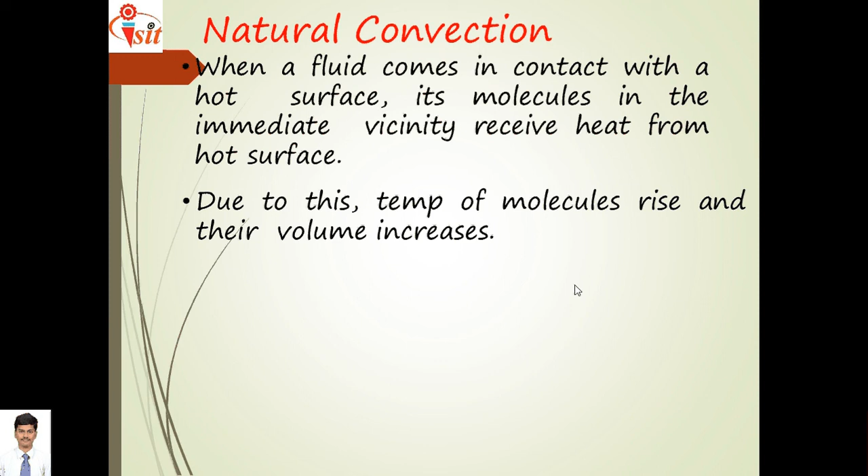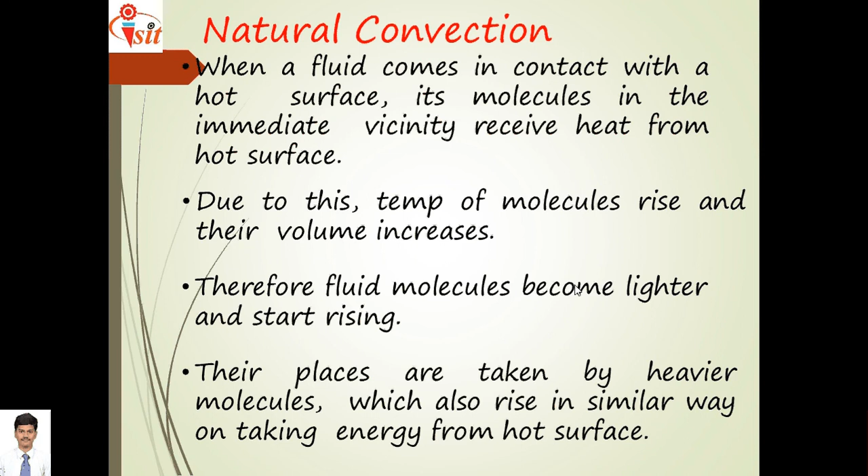So what is natural convection? When a fluid comes in contact with a hot surface, it receives heat energy as soon as it touches the surface and becomes hot. Due to absorption of heat energy, the temperature of the molecules rises and their volume increases. Therefore the fluid molecule becomes lighter, and as it becomes lighter it goes up and starts rising. It is replaced by heavier cold fluid, which again receives heat energy from the hot surface, goes up, and is again replaced by cold fluid.

This is the way of natural circulation of air, and the transfer of heat from a solid surface to fluid in this manner is called free convection or natural convection. As the fluid flows automatically, it is known as free convection. Similarly, when the surrounding fluid is hotter than the surface, heat transfer will take place from fluid to surface.

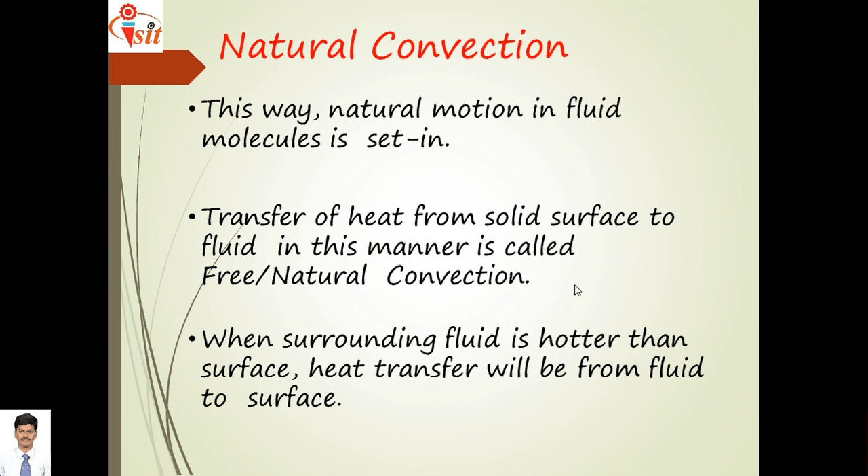So we will see a few examples here. First example, vertical hotter plate, which we can also treat as a wall. When the wall is hot because of absorption of solar radiation, air flows automatically outside, receives heat energy, goes up, and is again replaced by new cold air which again receives heat energy and rises. This is nothing but natural circulation of air, or natural convection current.

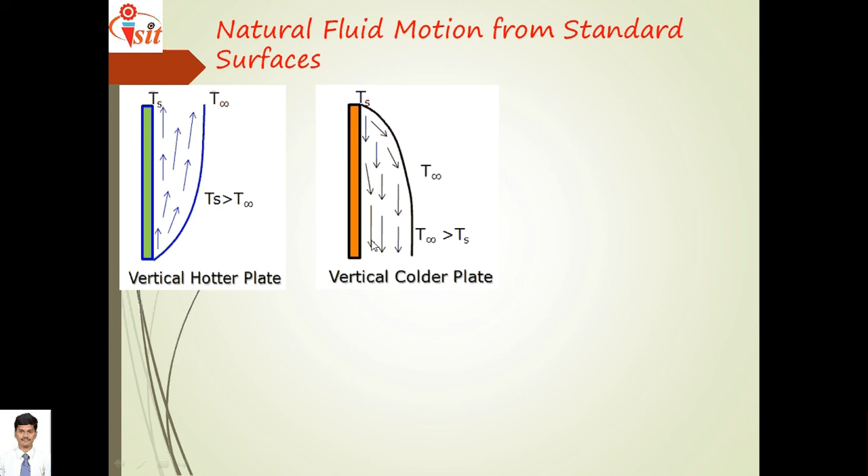This is the second case. What is the difference here? In the first case, surface temperature is greater than surrounding temperature, but here surrounding temperature is greater than surface temperature, so exactly the opposite phenomenon takes place. Hot fluid flows over this cold surface, is replaced by new hot fluid, and in this way natural circulation of air takes place.

This is the third case, horizontal hotter cylinder: air flows over it and cooling of the cylinder or sphere takes place. This is one more example, horizontal hotter plate. What is the difference between these two? Here the hot plate is vertical, here the hot plate is horizontal. As it is hot, air flows automatically over this hot plate, becomes hot, and goes up.

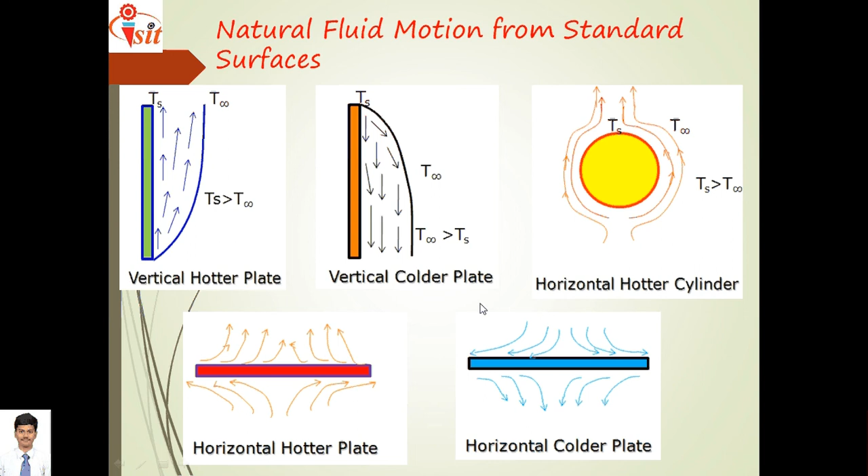Similarly, these two cases are alike, but one is a vertical cold plate and the other a horizontal cold plate, and the formation of the convection current is also different.

Now the governing equation: as we know from Newton's law of cooling, Q is equal to H A (Ts minus Tf), where A is the area of the object, Ts is the surface temperature, Tf is the fluid temperature, and H is a function of rho, g, beta, delta T, L, mu, Cp, K. From dimensional analysis we get the empirical correlation as HL upon K equals C times (rho square g beta delta T L cube divided by mu square) raised to A, times (mu Cp upon K) raised to B.

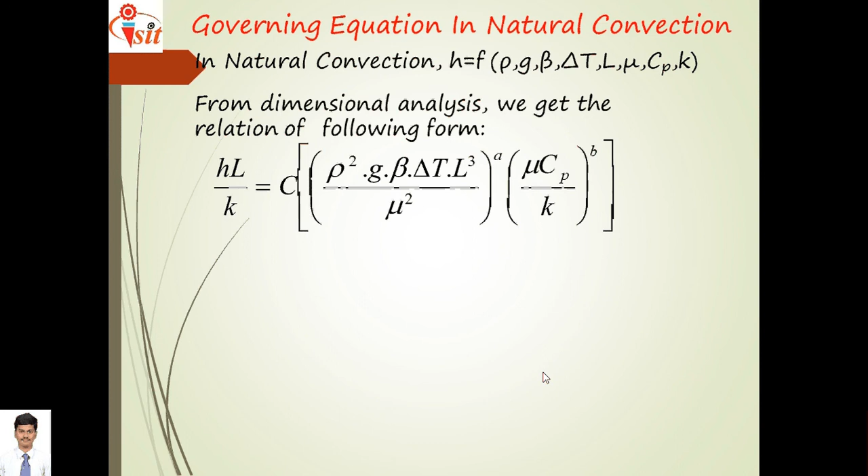HL upon K is nothing but the Nusselt number, so Nu equals C, a constant, times Grashof's number raised to A, times Prandtl number raised to B. We studied this formula in one of the earlier video lectures on dimensionless numbers. This term is known as Grashof's number, and it plays a very important role in natural convection: rho square G beta delta T L cube divided by mu square, times Prandtl number raised to B.

Mu Cp upon K is nothing but Prandtl's number. So Nusselt number equals C times the product of Grashof and Prandtl numbers raised to N, and this is the governing equation for natural convection.

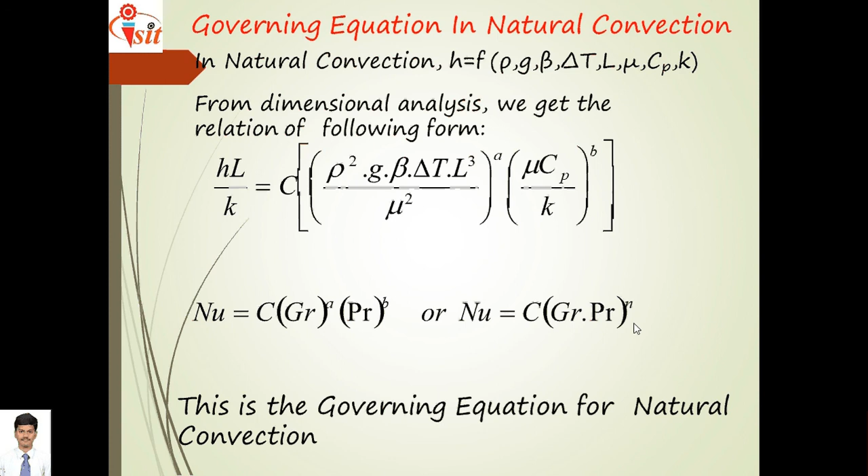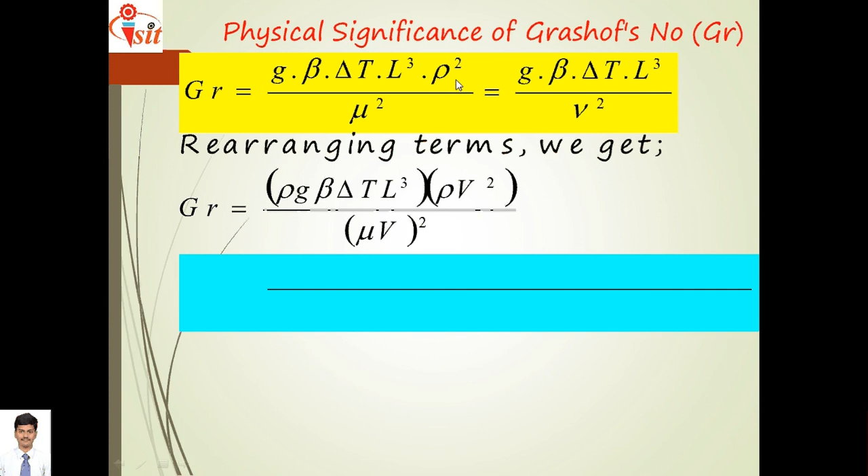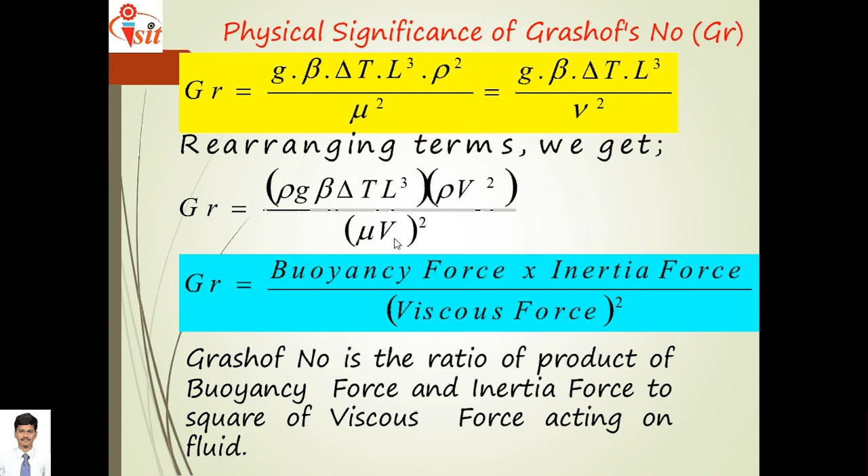What is the importance or physical significance of Grashof's number? Grashof's number equals G beta delta T L cube rho square upon mu square, and by rearranging this we get Grashof's number equals buoyancy force into inertia force upon viscous force squared. So Grashof's number is the ratio of the product of buoyancy force and inertia force to the square of viscous force acting on the fluid, depending on buoyancy force, inertia force, and viscous force.

Now various empirical correlations: in forced convection also we had seen a few empirical correlations. Students must remember that these empirical correlations will be provided to you in the examination. For a vertical plate and cylinder, Nusselt number equals 0.56 times (Grashof into Prandtl) raised to 1 by 4, and this equation is valid for a certain condition.

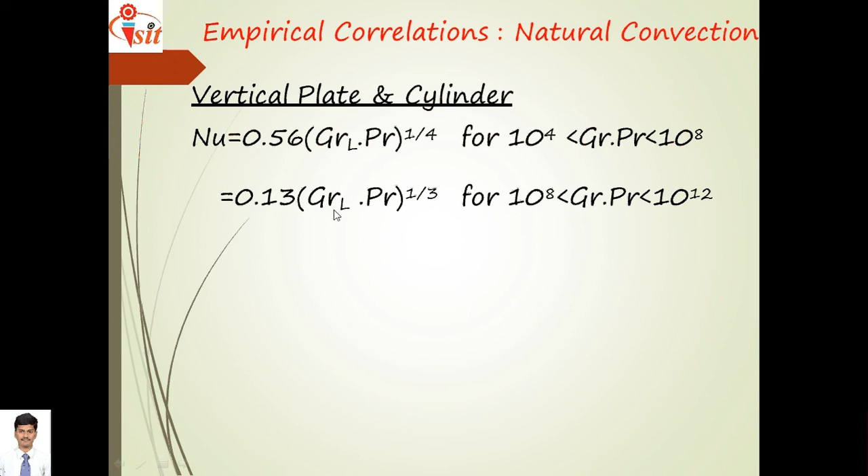The product of Grashof and Prandtl number must be greater than 10 raised to 4 but less than 10 raised to 8. If this condition does not occur, the empirical correlation becomes 0.13 times (Grashof into Prandtl) raised to 1 by 3. For a horizontal cylinder, these are the empirical correlations.

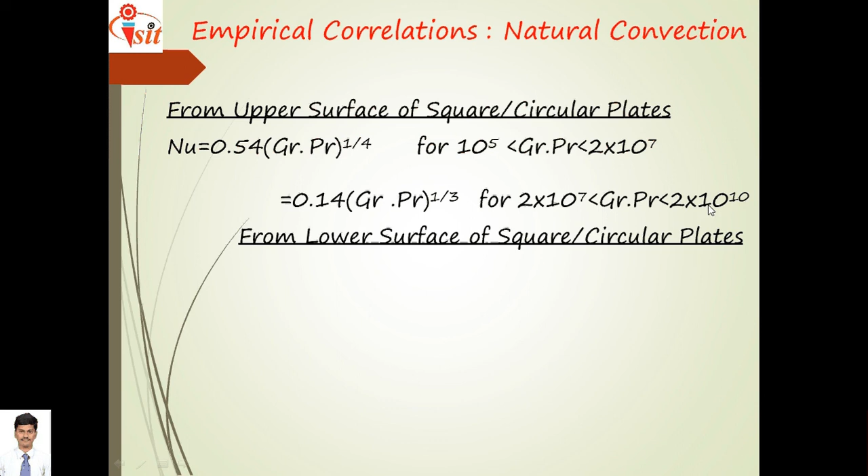For upper surface of a square or circular plate, Nusselt number equals 0.54 Grashof's into Prandtl raised to 1 by 4, and this is the condition to use this empirical correlation. Similarly, if Grashof's into Prandtl is greater than 2 into 10 raised to 7 but less than 2 into 10 raised to 10, we use this other empirical correlation, which will be provided to you in examination.

Students should remember L is the characteristic length, and L can be calculated by the formula A upon P, where A is the area and P is the perimeter.

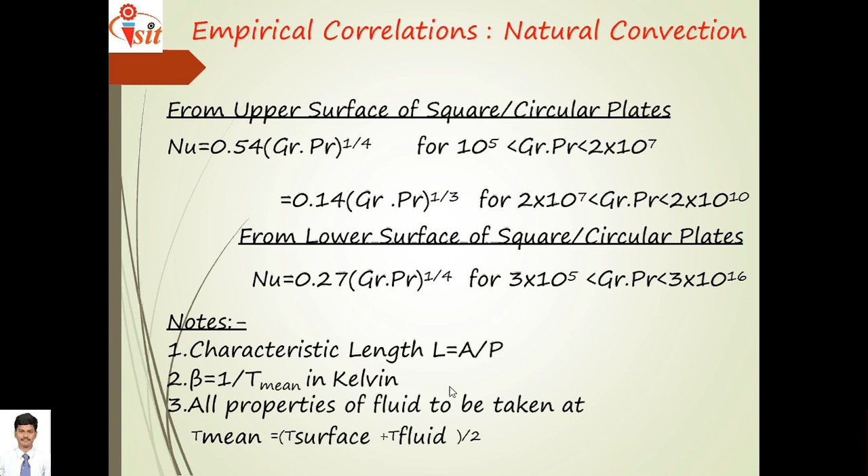Beta is equal to 1 upon T mean, where T mean means mean film temperature, and all properties of fluid are taken at mean film temperature. To calculate mean film temperature, we must know surface temperature of plate and fluid temperature, and the average of these two, Ts plus Tf divided by 2, is nothing but mean film temperature.

So, a few dimensionless numbers we already studied: for conduction, Biot number equals HL upon K, Fourier number equals alpha T upon L square. For forced convection, various dimensionless numbers exist, with Nusselt and Prandtl being common to both natural and forced convection. Nusselt number equals HL upon K, Prandtl number equals mu Cp upon K, Reynolds number, very important in forced convection, equals rho VL upon mu, Peclet number is the product of Reynolds into Prandtl, and Stanton number equals Nusselt number upon Reynolds number into Prandtl.

Whereas in natural convection, Grashof's number is very important: G into beta into delta T L cube divided by nu square. Rayleigh's number equals Grashof's number into Prandtl's number. If it's mixed convection, with velocity between 0.3 to 30 meter per second, we can use Graetz number, GZ, equal to Grashof's into Prandtl into D upon L.

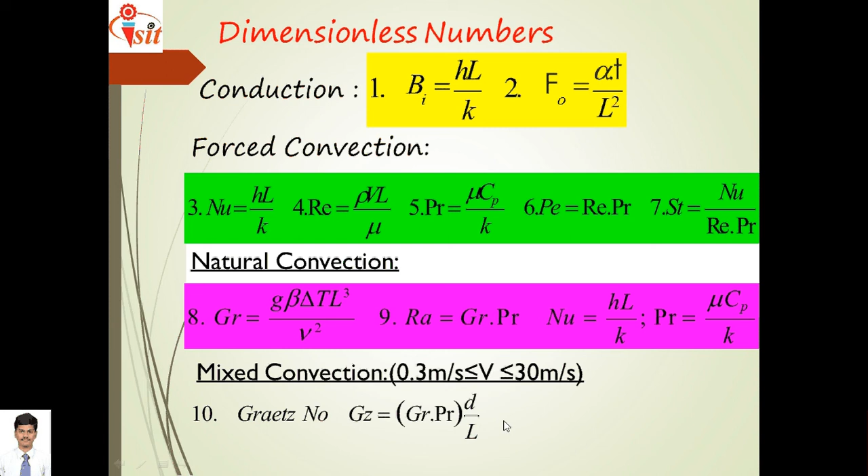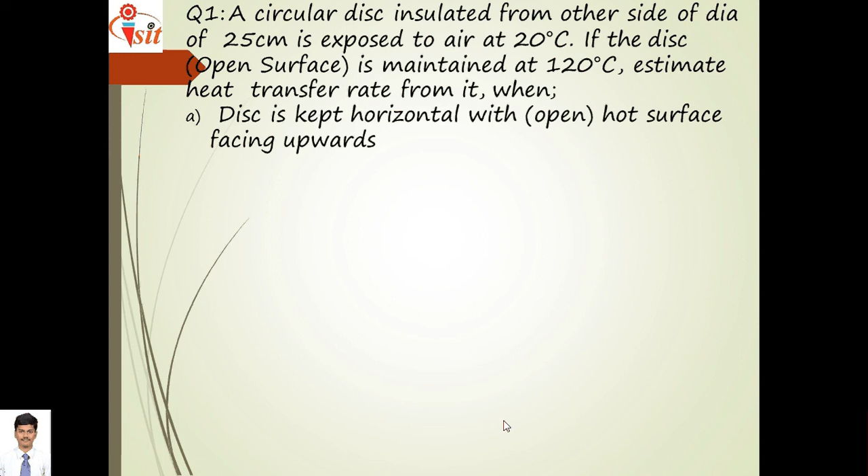We'll solve one numerical based on this. A circular disc insulated from the other side, of diameter 25 cm, is exposed to air at 20 degrees centigrade. If the disc is maintained at 120 degrees centigrade, estimate heat transfer rate from it when the disc is kept horizontal with hot surface facing upward, disc kept with hot surface facing downward, and disc kept vertically.

Now for air at 70 degrees centigrade, what is this 70 degrees centigrade? It is the mean film temperature, that is Ts plus Tf divided by 2, 120 plus 20 divided by 2. At mean film temperature, properties of air are given.

So we have to estimate heat transfer rate Q, and for convection Q equals HA into Ts minus Tf. Here, as it's a circular disc with diameter 25 centimeter, area equals pi by 4 d square, so convert this diameter into meter. Ts is given as 120, Tf, fluid temperature, is given as 20. Only H is not given, so H will be different for these three cases.

H will be calculated by knowing Nusselt number in all three cases. Nusselt number equals HL upon K. Here Prandtl number is directly given, so use this Prandtl number directly in all three cases. Only Grashof's number will be different.

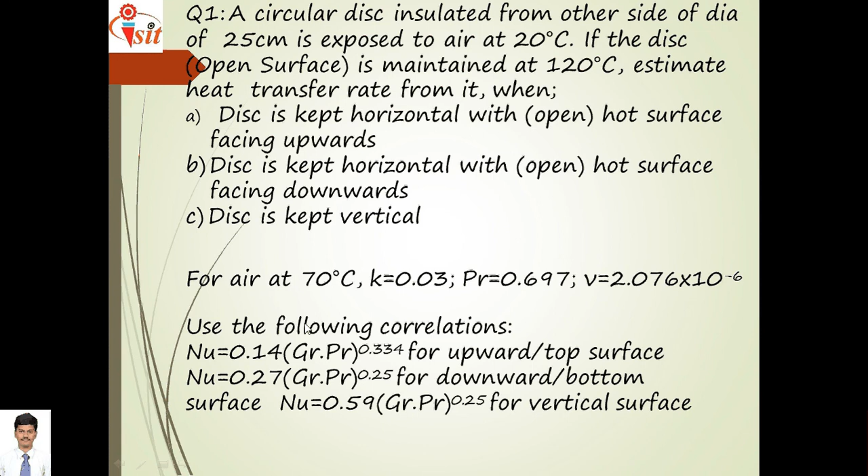We'll see the first case: horizontal plate, convection from top surface, heat flow rate Q equals HA delta T. The empirical correlation given to us is: Nusselt number equals 0.14, Grashof's into Prandtl raised to 0.334, where Prandtl number is directly given. So just go for Grashof's number.

Grashof's number equals G beta delta T L cube divided by nu square. Here nu, delta T, and G are given. Beta and L, the characteristic length, are not given, so we have to find them. Beta equals 1 upon T mean. Mean film temperature is 70 degrees centigrade; convert it to Kelvin, so beta equals 1 upon 70 plus 273, giving beta as 0.0029, which is common in all cases.

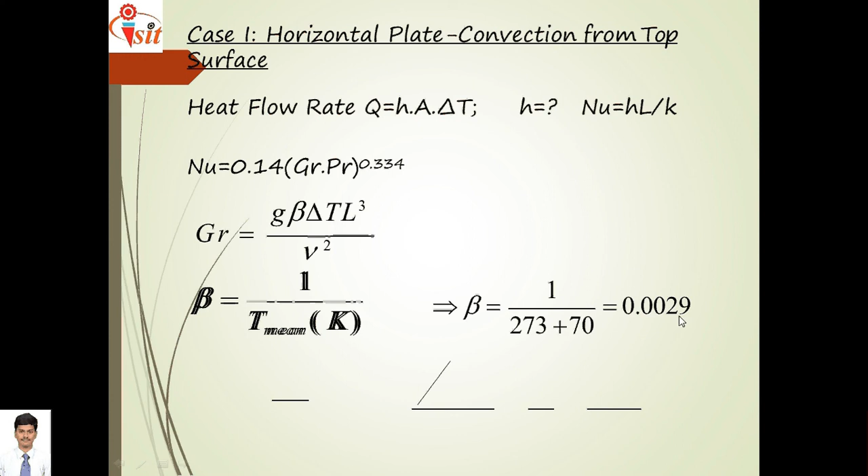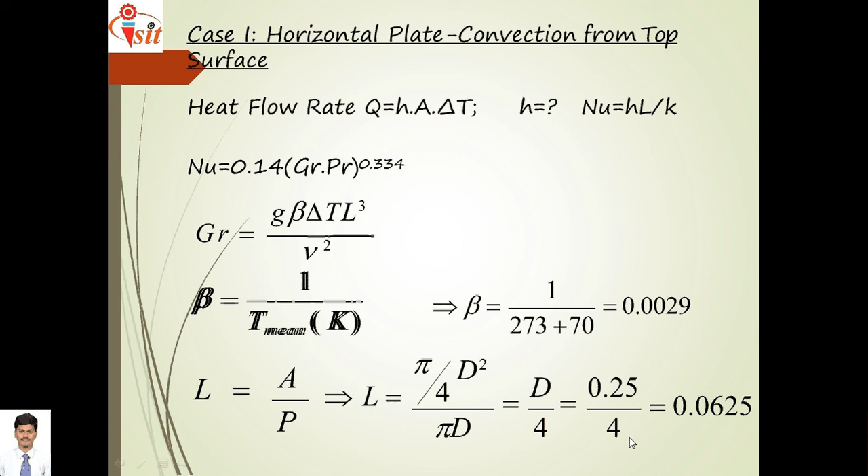So only the characteristic length changes. In this case, L equals A upon P, area upon perimeter. As it's a circular disc, its perimeter is pi d and its area is pi by 4 d square, so L equals 0.25 upon 4, that is 0.0625. Using these values in Grashof's number formula, Grashof's number equals 1.62 into 10 raised to 8, and putting this into the given empirical correlation we get Nusselt number as 68.51.

Once the value of Nusselt number is known, using Nusselt number equals HL upon K, we find H equals 32.88. Once H is known, use the formula Q equals HA delta T, with H as 32.88, A equals pi by 4 d square, and Ts minus Tf. So in the first case, Q equals 161 watt.

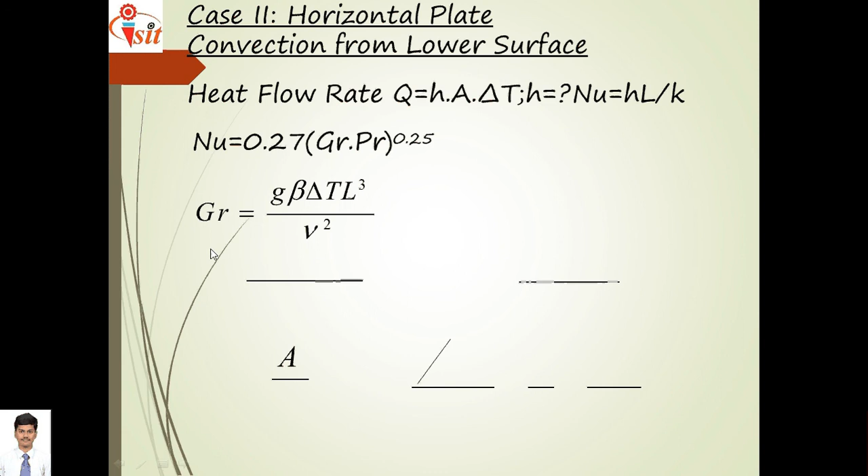Similarly, in the second case, Nusselt number equals 0.27 Grashof's into Prandtl raised to 0.25; this empirical correlation is given. Again use the same value for Prandtl number; only Grashof's number will change, and Grashof's number will be 1.62 into 10 raised to 8. Substituting this into the given empirical correlation, we get Nusselt number as 27.83, and using this, H equals 13.36. Using this value in the given equation, we get Q equals 65.6.

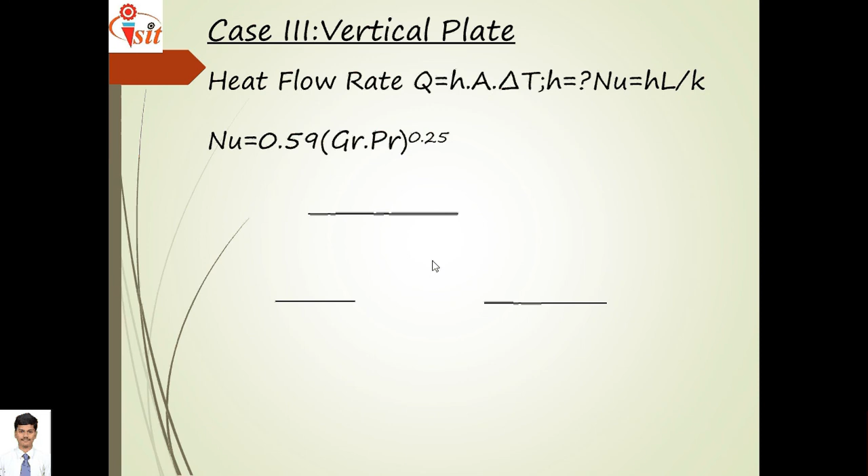Similarly, for vertical plate, the empirical correlation is different. Apply the same steps: find out beta, find out L, substitute in the given Grashof's number equation, substitute in the given empirical correlation, find out Nusselt number, then find out H, and use the value of H in Q equals HA delta T. Thank you, thank you very much.